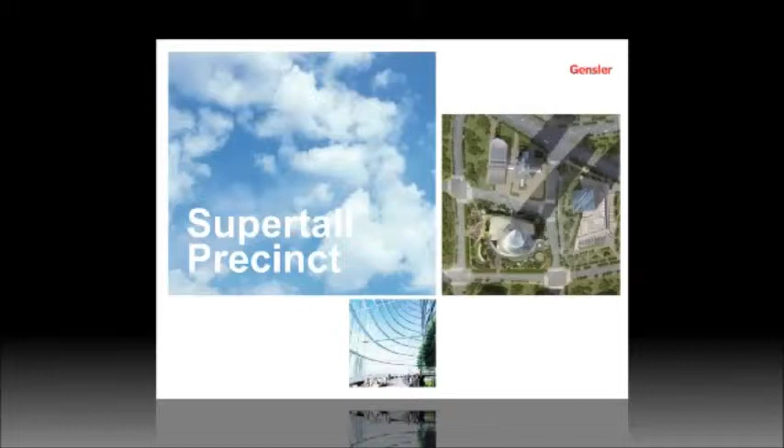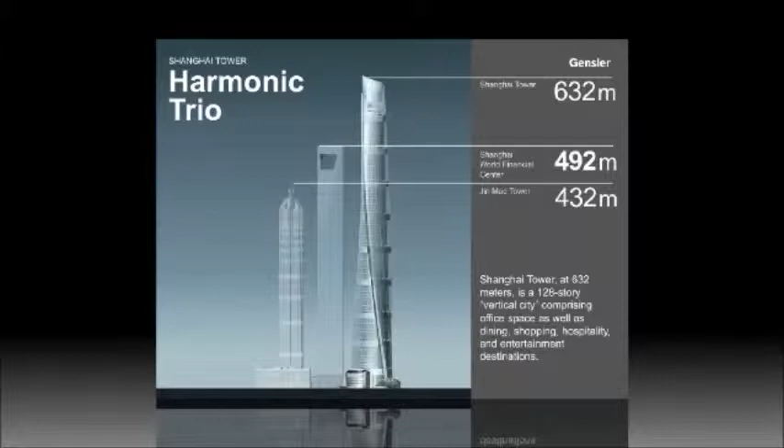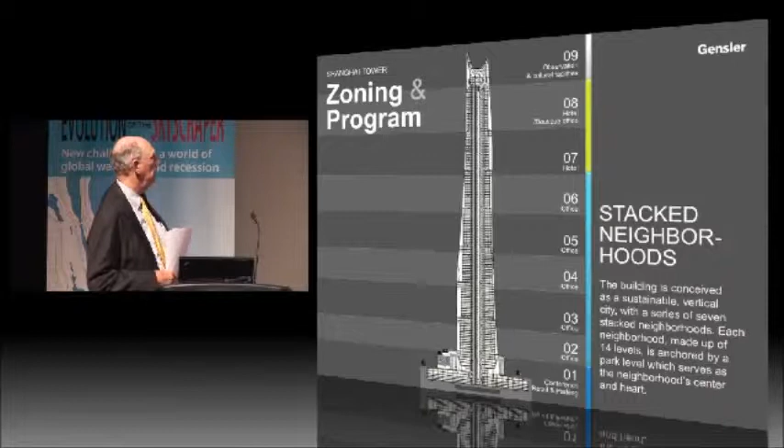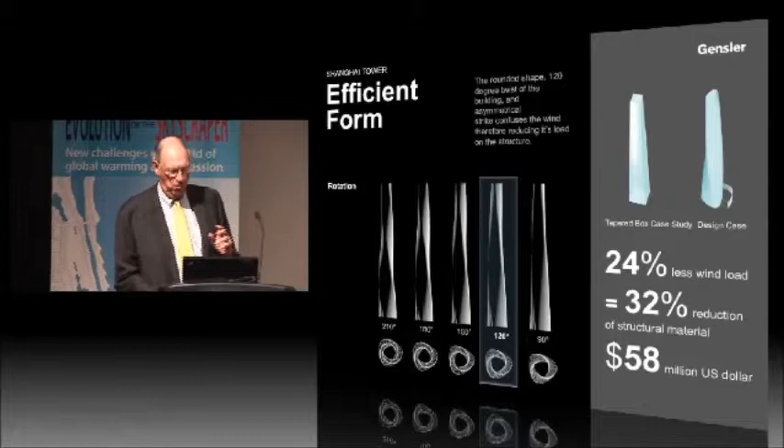It was interesting, we studied the twisting of the building and how that would work, and we found that a 120-degree twist gave us the best structural work, and I'll show you that in a second in the wind tunnel test.

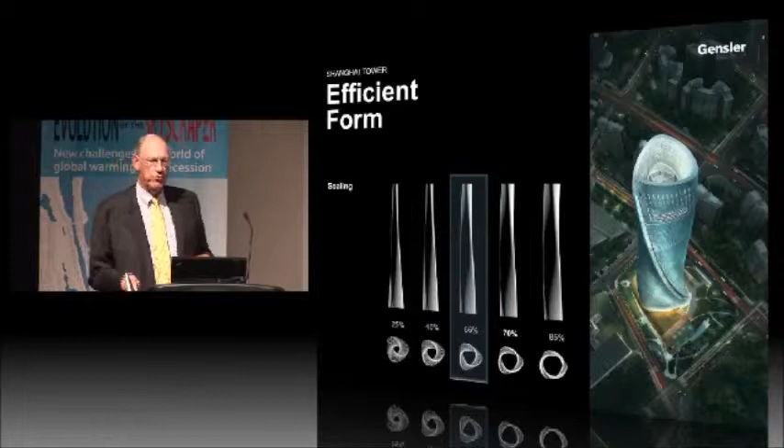And then we also studied the taper of the building and found that a 55% taper allowed us to have the best efficiency of form and shape. It allowed us to have smaller floors at the top for hotel and observation and boutique spaces, and then the lower floors are larger and work better for the uses of the office space.

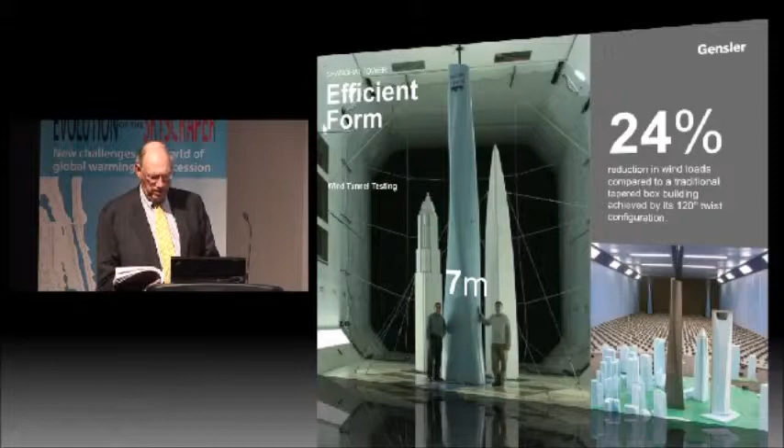Here's the wind tunnel test. We started with a small wind tunnel test on the lower right-hand corner, and then when we decided we would really go for it, we built a 7-meter tall model, and then modeled both Jinmao and World Financial Center, allowing us to prove that we could reduce the structural loads by 24%, which really helped in cost, and we were able to save significant cost when we did that.

Now the building also has a double skin, and it's interesting that the building is a series of stacked cylinders. Each floor is round, and you can see that on the inner circle. But the outer triangular, soft-edged triangle rotates and twists this 120 degrees, and we have a notch in that breaks up the wind eddies to also support the structural reduction that we were able to accomplish.

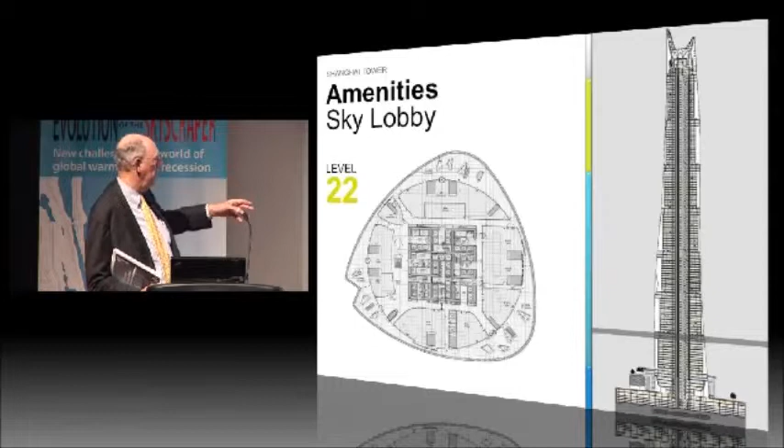These floors, therefore, go to the outer skin as the amenity floors and allow for all sorts of uses. Instead of going down 100 stories to get a cup of coffee, there'll be every 14 floors, there'll be coffee shops and all sorts of amenities, depending upon the use. And there'll be lobbies for the hotel operations.

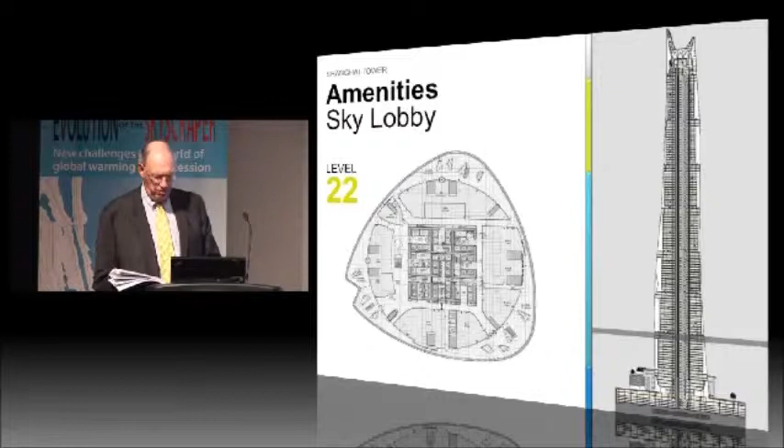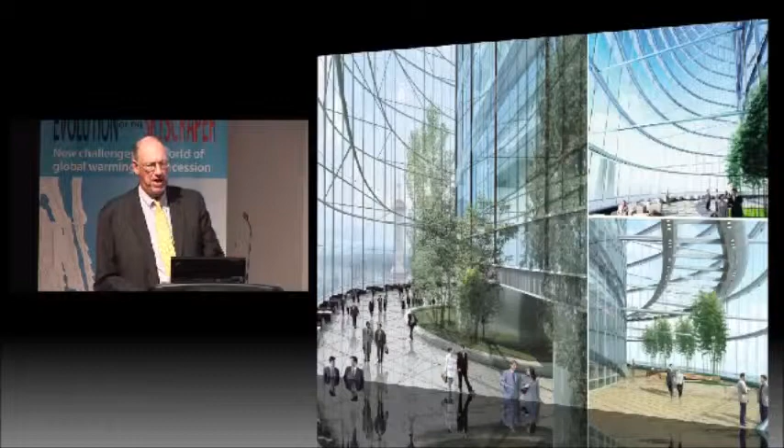And this is kind of what these amenity floors will look like. And they'll have a tapered atrium that is supported by this sort of bicycle support structure that we've created on the outside.

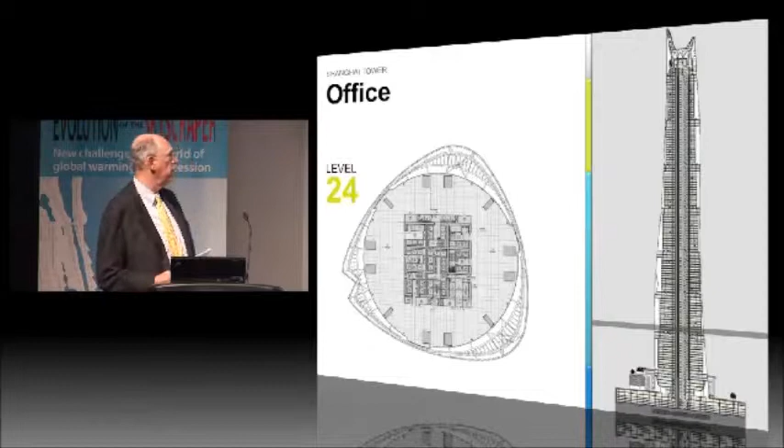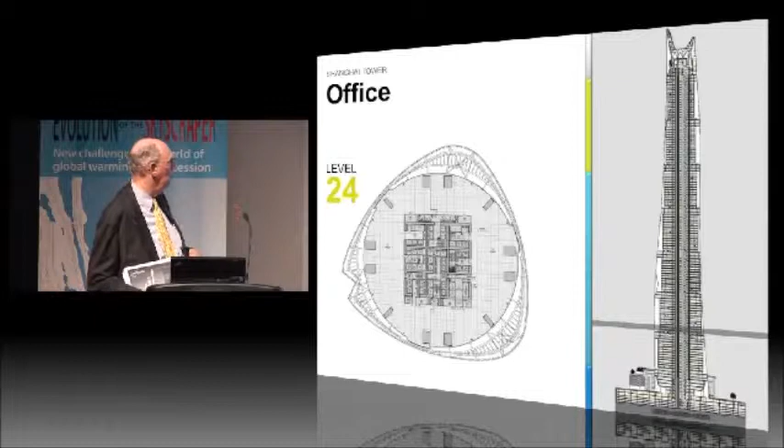The office floors, again, will be a round cylinder, and I just point out the structural system. I'm sorry we can't talk more about it because it's a tremendous system, but it is a composite concrete steel core that reduces as it goes up. There are the 4 super columns on the top, bottom, and 2 sides, and then intermediate columns that go up partial way because of the spans. As the floors get smaller, we don't need those intermediate ones on the diagonal as support columns.

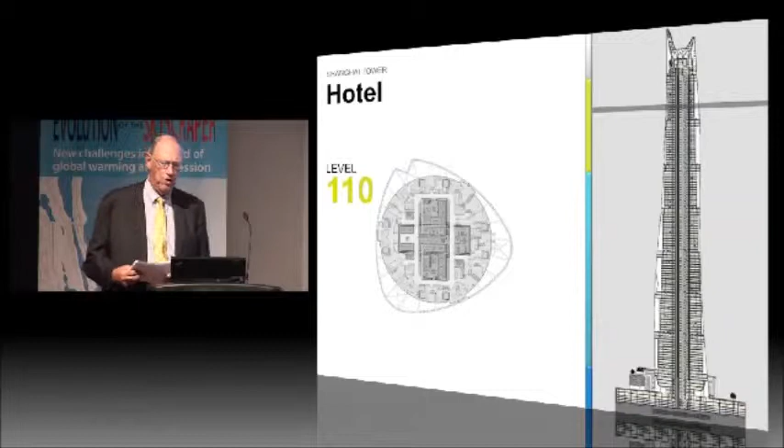The hotel level gets us 191 hotel rooms in a series of hotels and lays out in a unique and wonderful way. As you can see, the diagonal columns have dropped off and the core has gotten much, much smaller.

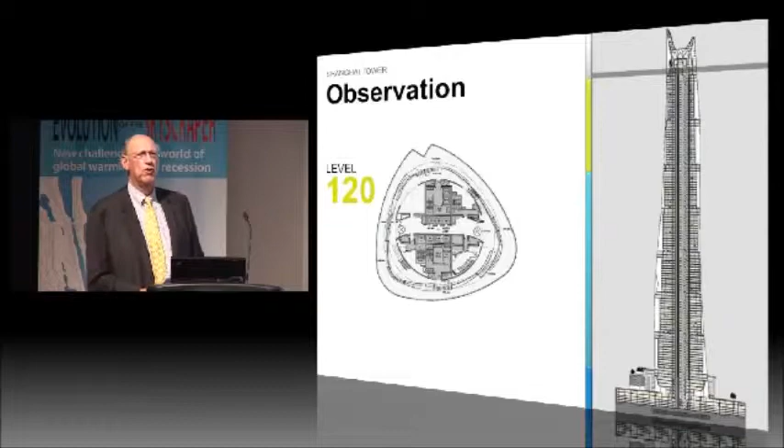And then on the very top, we have 4 observation floors. 2 are enclosed observation deck. 1 is a restaurant, and the top floor is an open observation deck, which also will be able to look at the wind turbines working, a little bit of the damper working, and the rainwater collection system, which is part of our sustainable goals. And that rainwater will be used for gray water throughout the building.

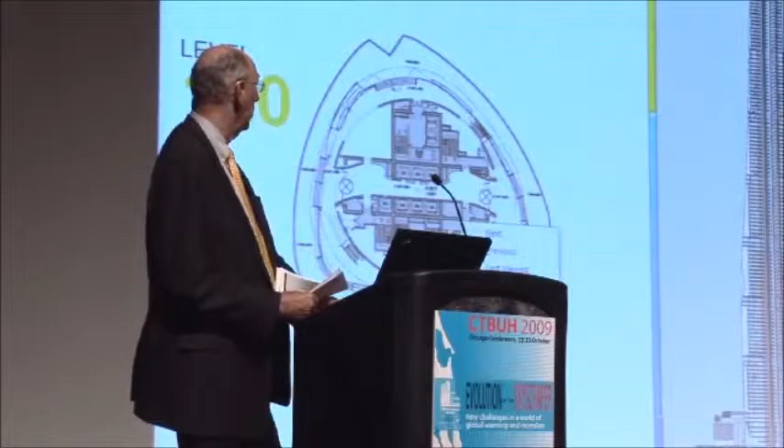This is sort of the way the interconnection floors at the observation deck work, and I won't get into that in detail. One of the things that we've talked about is this intelligent skin.

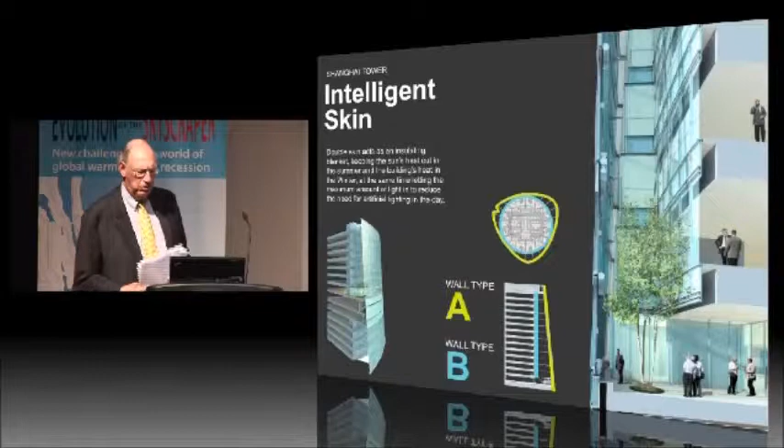We've got an outer skin, which is really the barrier skin. It's a single laminate glazing system with a frit pattern on it that varies between the north, south, east, west. We've designed the frit system to be very much in line with the solar orientation. And then the inside wall type on the cylinders is a double glazed insulated wall glazing system.

So some of our sustainable goals are really taking a high-rise office building to the maximum, a new regional benchmark we're trying to set for China and especially for Shanghai. Ultra-low energy carbon uses, reducing it by about 20%. Bioclimate design and intelligent skin, very intelligent skin. Integrated water and waste management, sustainable materials, and integrated landscaping.

These are the efficiencies we're trying to get to. Lighting controls 24% below normal. Envelope 7% below normal. Central plant 36%. HVAC 33%. And that's about 15 million RMB per year, which amounts to about $2.5 million worth of savings a year in energy costs.

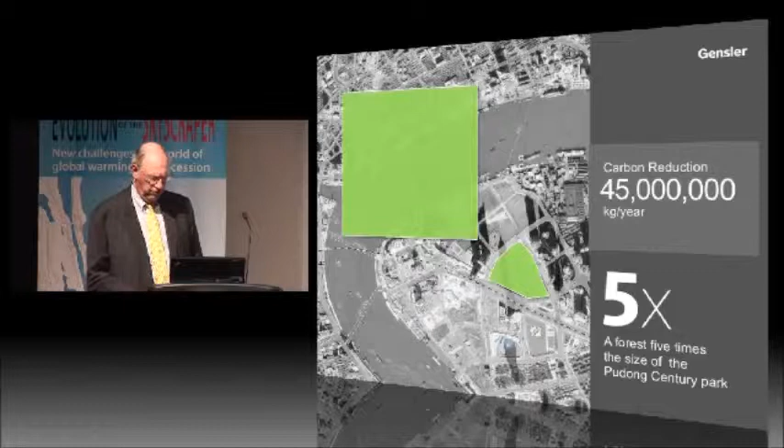Just some interesting things on carbon reduction. We're reducing carbon, and I love the comparison: it's like 5 times the forest of the Pudong Century Park, which is a major park right adjacent to our site. That will be a major reducer of carbon by the way we've designed it.

On water saving, we're doing amazingly well. We've got 675 million liters that we're reducing from normal use because of gray water and other collection systems.

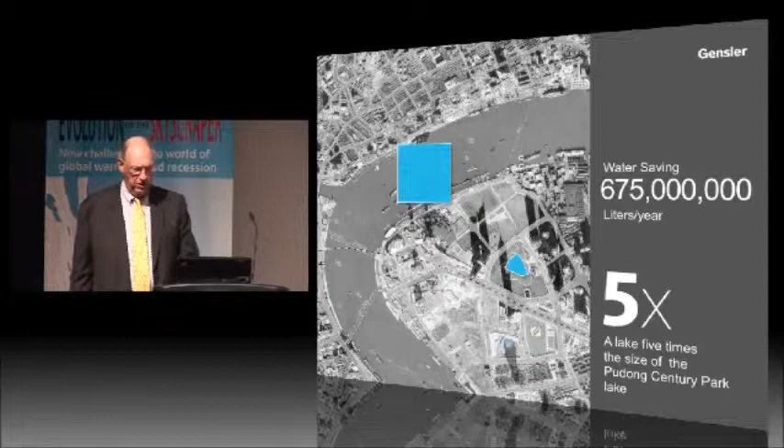Very, very interesting that the site required that only half the site be covered by building, so we have a 50% open park area. Of that park area, we've got some roads in it, but 33% of the total site will be green landscaped park area, which will be for the people of Shanghai and also part of the quality of the building and the quality of the sustainable efforts we're putting in.

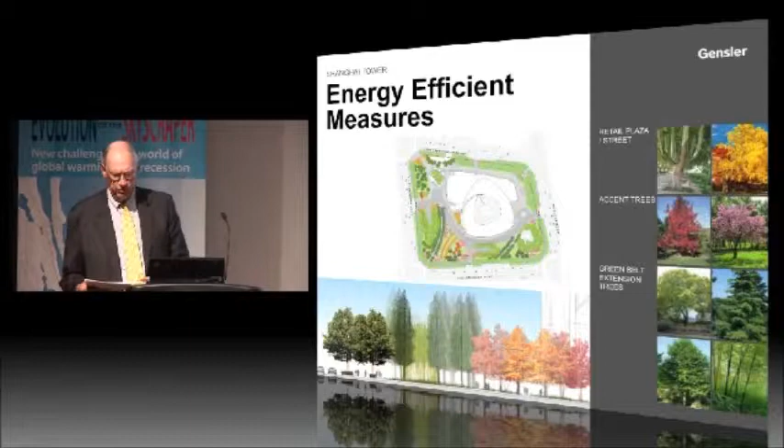The elevatoring system is interesting. We have 106 elevators, which seems like an awful lot, but it's interesting - we've got 20 double-deck elevators, 86 single-deck elevators, and 37 escalators. It's a really wonderfully efficient system. Basically, the concept is you ride double decks to your zone and then circulate within your zone on single-deck elevators, so we're able to use the same shafts stacked up on top of each other to make that work.

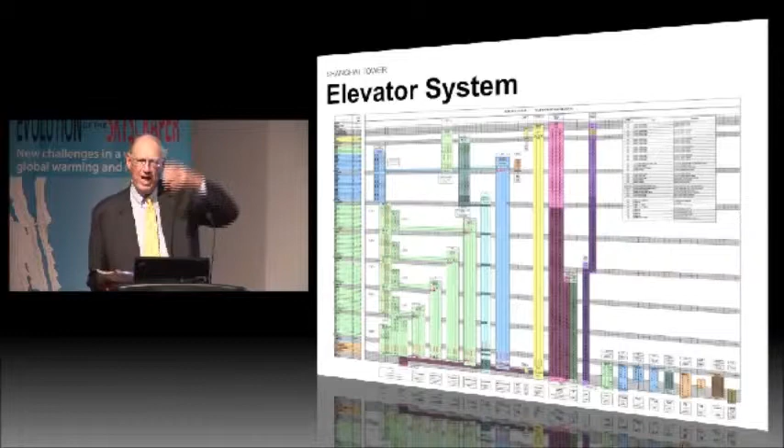And we can have all the mechanical equipment in these area refuge floors. The only thing that fascinated me was we can't run a freight elevator from bottom to top because there's no cable strong enough to lift it that far - the cable weighs more than the motors can carry it up. But we do have double-deck airlifts that run to our observation deck all the way to the top and run to the hotels, and hotels are above and below the drop-off point.

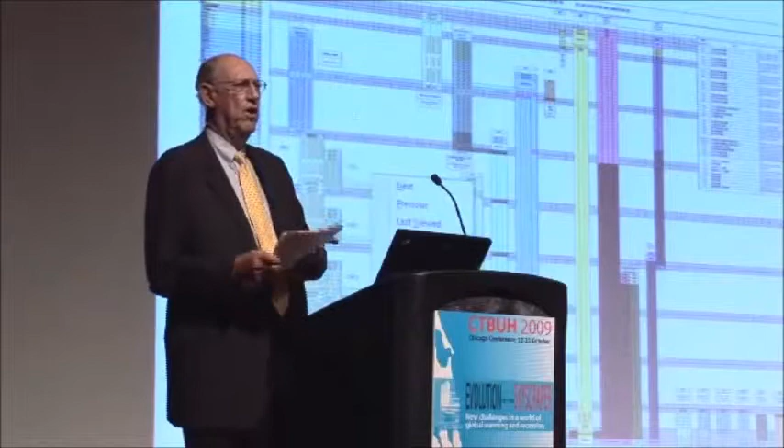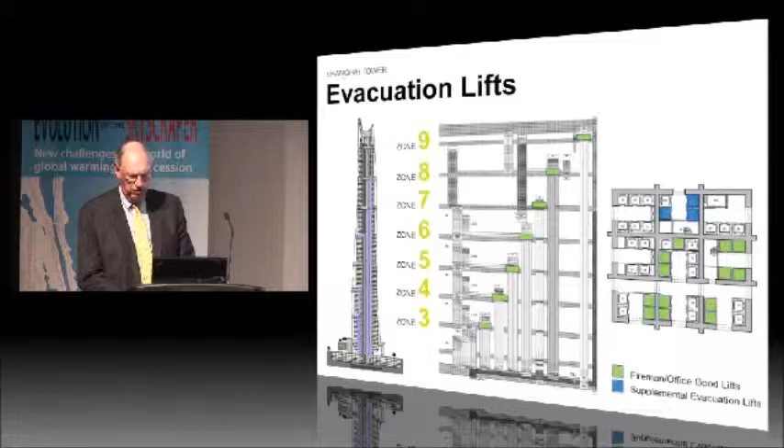So they have two lobbies on the amenity floor, one you go down, the other you go up. The thing that's interesting is the building would take 2 hours to evacuate under normal circumstances, so we're working with the fire protection people to use some of the double-deck elevators to take people out as well. And then we have the fireman's office and good lifts, which are used but can be used in case of fire for evacuation as well.

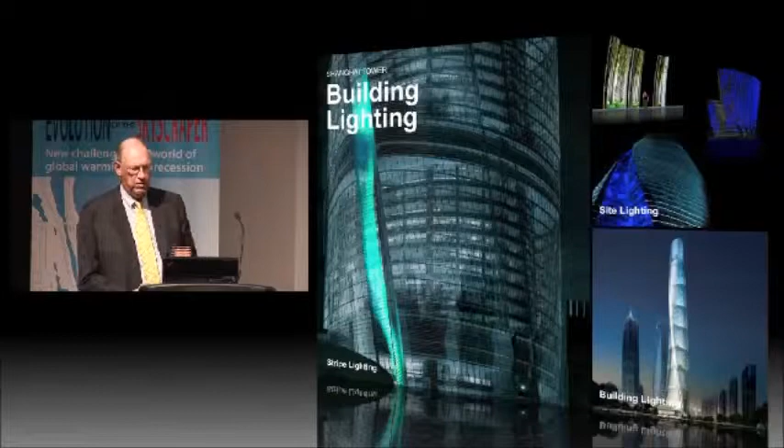Building lighting will be, as I mentioned, done by our wind turbines, and we're planning to have an LED strip that follows this snaky V notch as we go up the building, and it will be programmed for all sorts of kind of adjusting to the climate, adjusting to other things so that it won't be a static element.

Recycling is a big thing with them, and we will have recycling on each floor, but we're going to have recycling depots at each of the below the amenity floors in the area refuge areas, and then nightly that'll be dropped to a storage area and distribution area down in the lower levels.

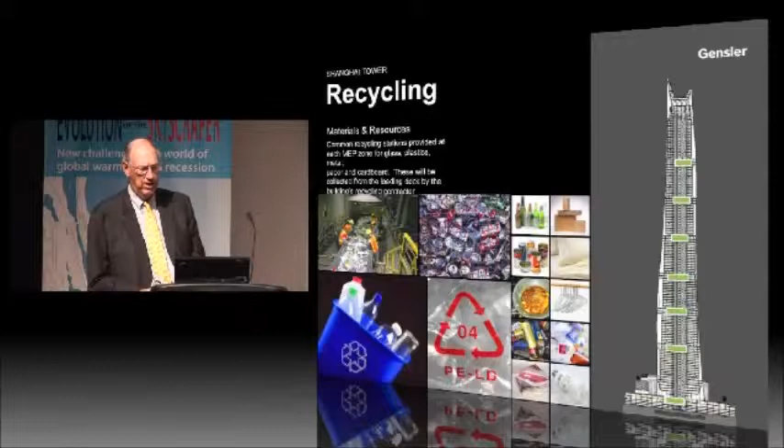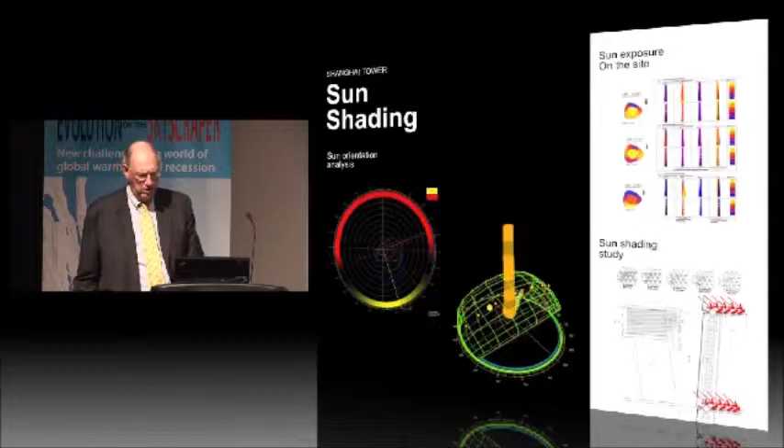Water resources - I'd say it's a 40% reduction in water consumption, with gray water being a big possibility used in everything except the actual drinking water. And sun shading, as I mentioned, on the frit patterns will be not a uniform pattern, but it'll be designed and set up based on solar orientation.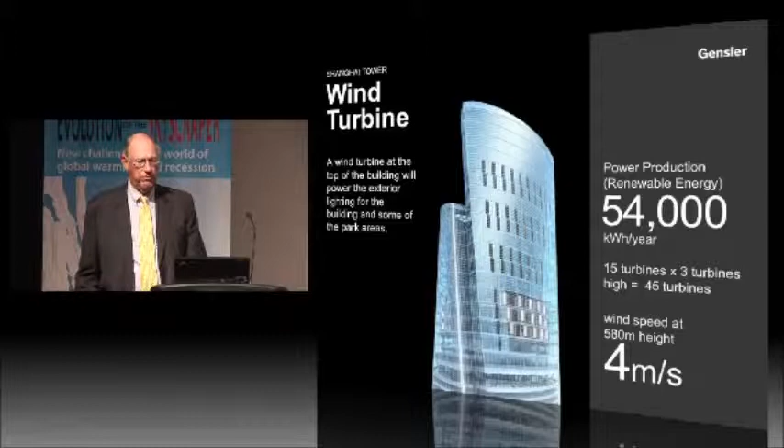The wind turbine is at 54,000 kilowatt hours a year, and we're lucky we have a constant wind speed of about 4 meters per second, which we think is going to give us pretty uniform power generation to work the night lighting. And then the top of the building is a water collection area as well.